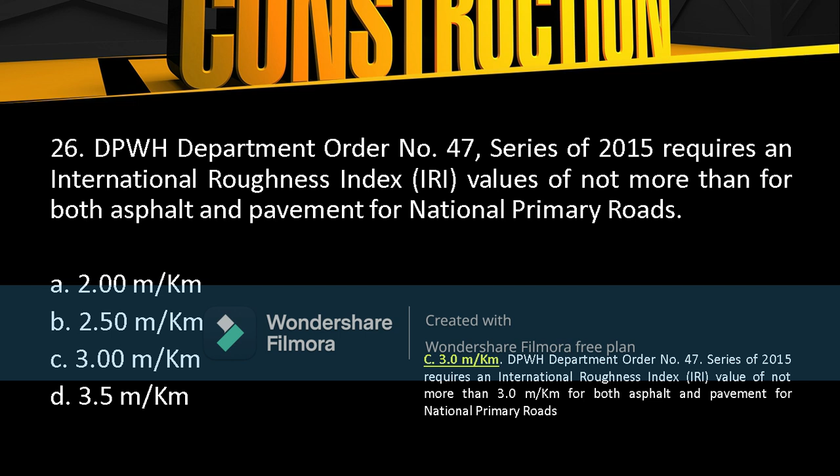Per kilometer for both asphalt and concrete pavement. So ito ang paliwanag sa Department Order ng DPWH Series 2015. So the DO number 47 requires an IRI or International Roughness Index value of not more than 3 meters per kilometer for both asphalt and concrete pavement for national primary roads. So clearly, ang tamang sagot dito ay letter C. So ayan. And now let's proceed to number 27.

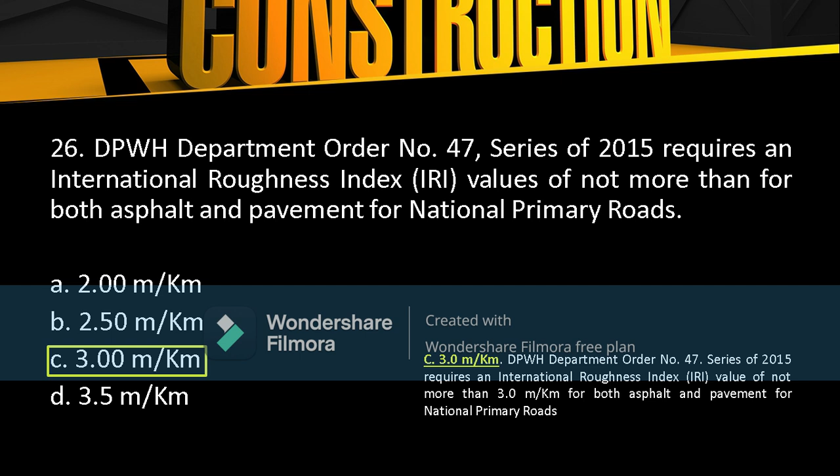For question number 27, to facilitate finishing, forms used on ornamental works, railings, parapets, and exposed vertical surfaces shall be removed in not less than blank nor more than 48 hours, depending upon weather conditions. In order to determine the condition of concrete in columns, forms shall always be removed from them before the removal of shoring from beneath beams and girders. So, sa katanungang ito naman, in-emphasize dito kung kailan nga ba ang pag-remove o pagtanggal ng mga porma sa isang konkreto.

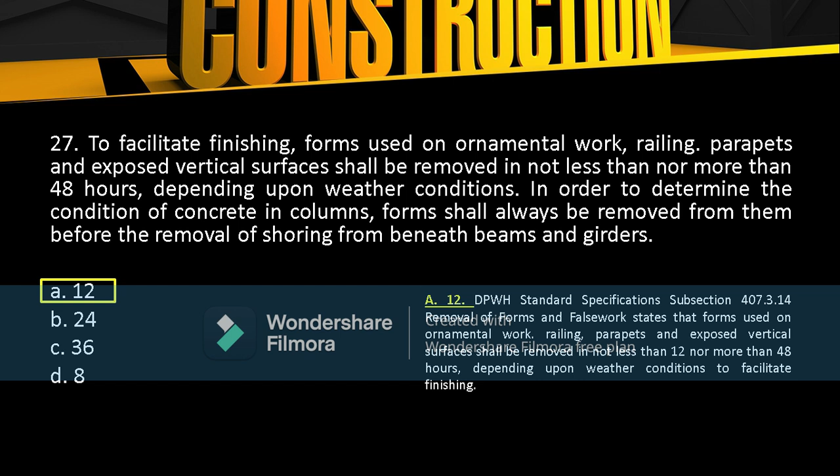A new technology used in the non-destructive testing of the quality and strength of concrete is through a or an blank. So we have also four options here in question number 28. For letter A, nuclear density gauge, B, Geiger counter, C, ground radar, and D, ultrasonic tester.

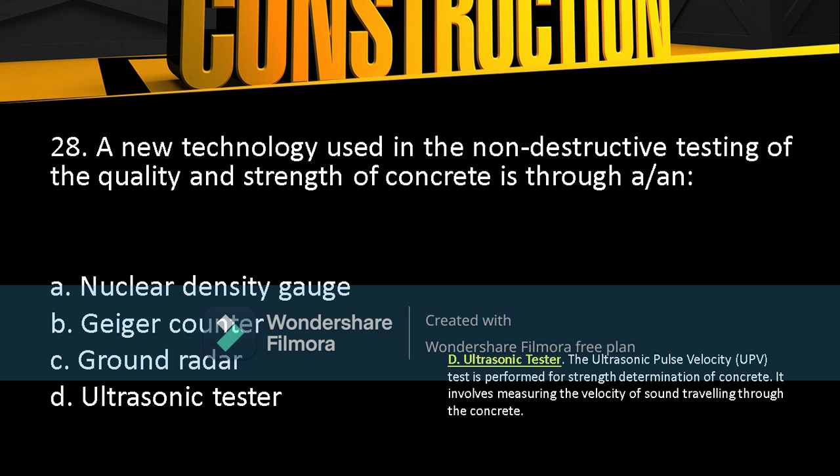So by looking at our reference book, the ultrasonic pulse velocity or the UPV test is performed for strength determination of concrete. It involves measuring the velocity of sound traveling through the concrete. So, ang tamang sagot ay letter D, ultrasonic tester. So, I think it's very clear.

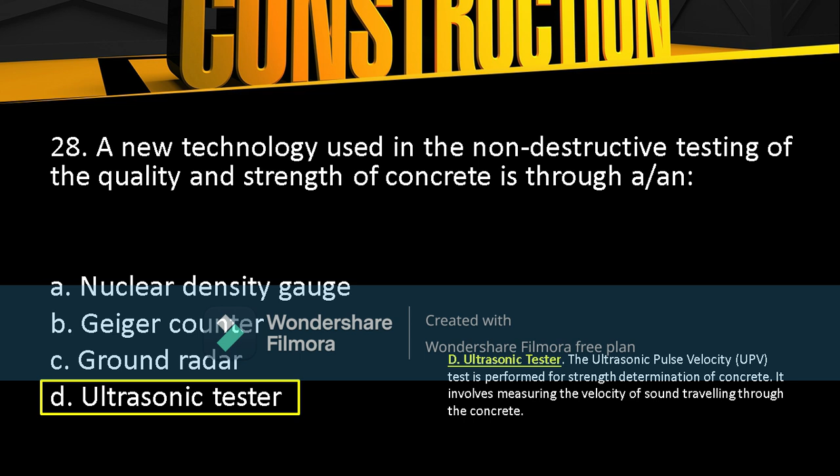Let's move to number 29. Why are undisturbed samples used primarily for determining the properties of foundation materials?

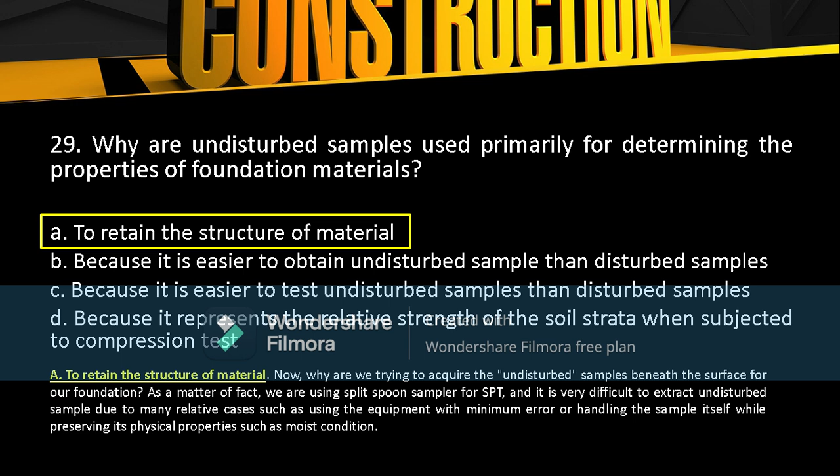Let's proceed to number 30. The purpose of conducting laboratory CBR or the California Bearing Ratio test on the fill materials for embankment is to check blank. For letter A, permeability of the compacted subgrade materials. For option B, swelling characteristic of the subgrade material. For option C, bearing capacity of subgrade materials. And D is all of the above.

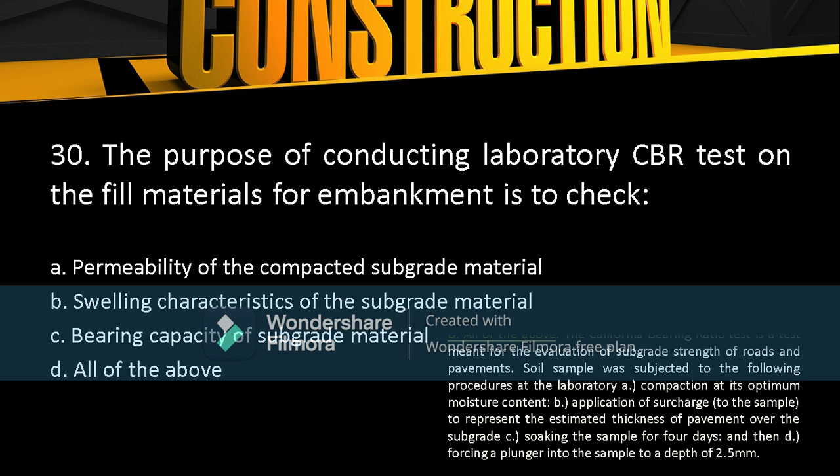The California Bearing Ratio or the CBR test is a test meant for the evaluation of subgrade strength of roads and pavements. The sample is subjected to the following procedures at the laboratory. A, compaction at its optimum moisture content. B, application of surcharge to represent the estimated thickness of pavement over subgrade. C, soaking the sample for 4 days. And D, forcing a plunger into the sample to a depth of 2.5 millimeters.

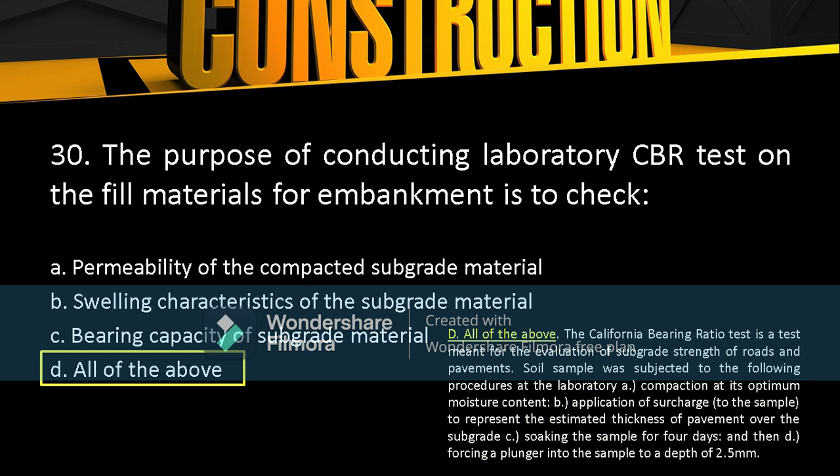So, letter D. Now, let's proceed to question number 31. A mixture of asphalt cement and water with catalytic agent is called?

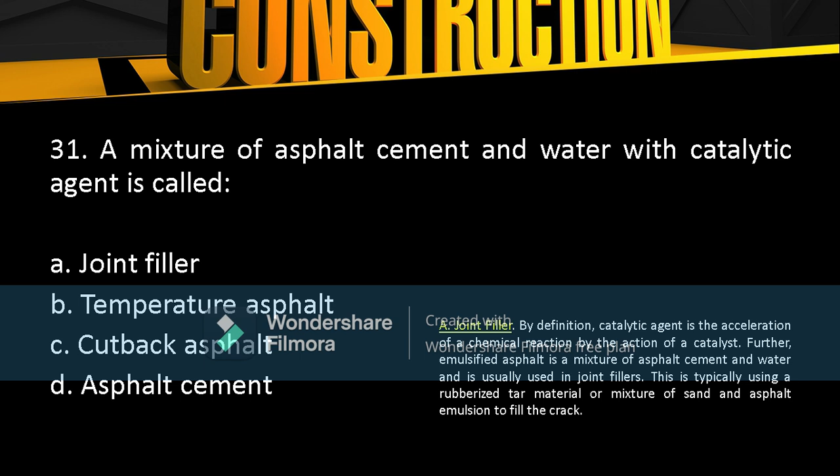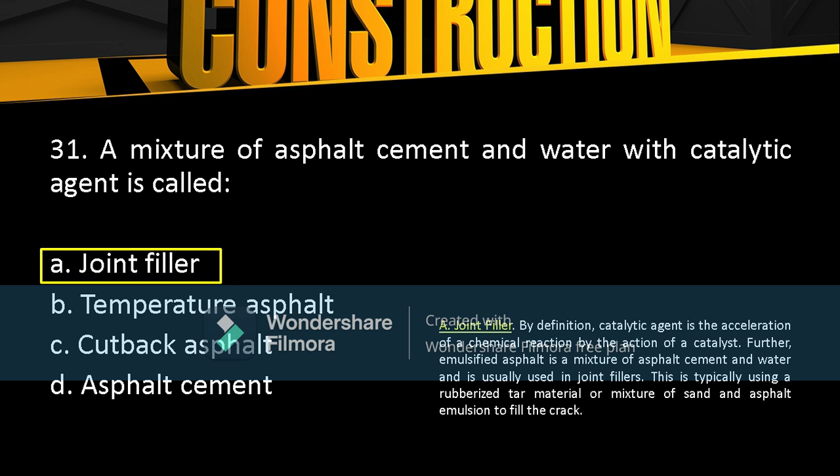So again, for this question number 31, our answer is letter A, joint filler. For question number 32, the Department Order 126 series of 2017, commonly called the DPWH Standard Specification for Item 743, geofoam as an alternative embankment material, states that geofoam is made of what kind of material?

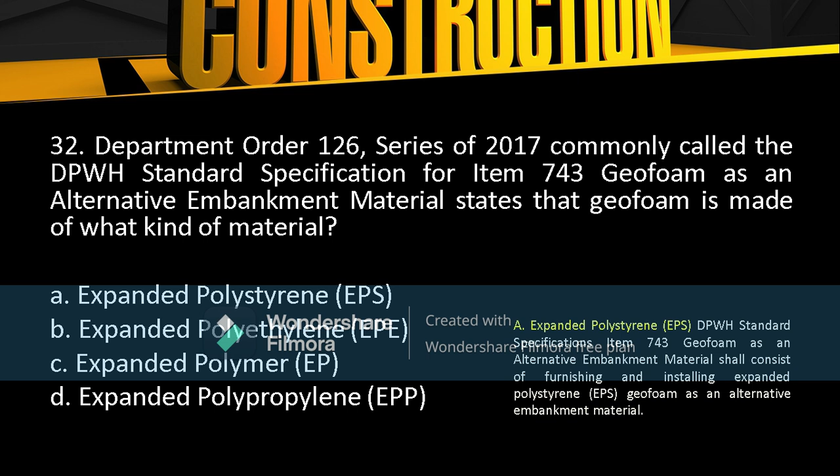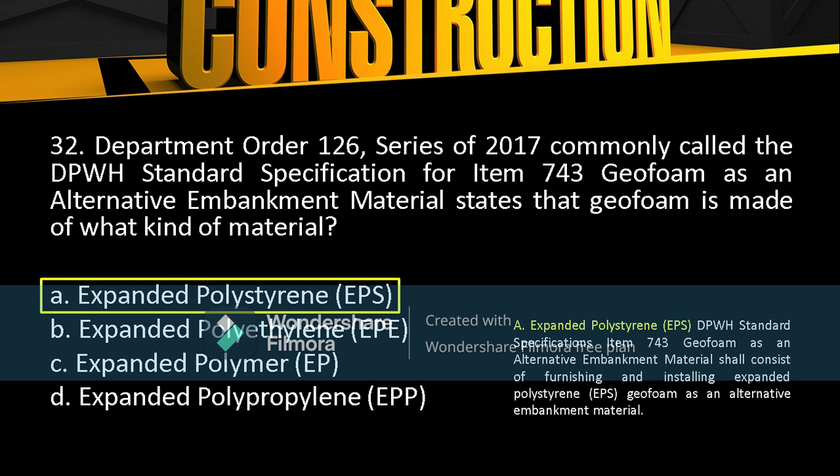So, for question number 33, a one-lane with pavement width of 3.5 meters and shoulder width of 9.5 meters on each side of the pavement was designed to have subbase and base courses with a combined thickness of 300 mm. If the thickness of the subbase is 125 mm, the spreading and compaction of the subbase and base courses shall be carried out in. So we have four options provided for this question.

For letter A, 3 layers over the full width of 4.5 meters. Letter B, 2 layers over the full width of 4.5 meters. For letter C, 3 layers over the full width of 3.5 meters. For letter D, 2 layers over the full width of 3.5 meters. So by looking at our reference book,

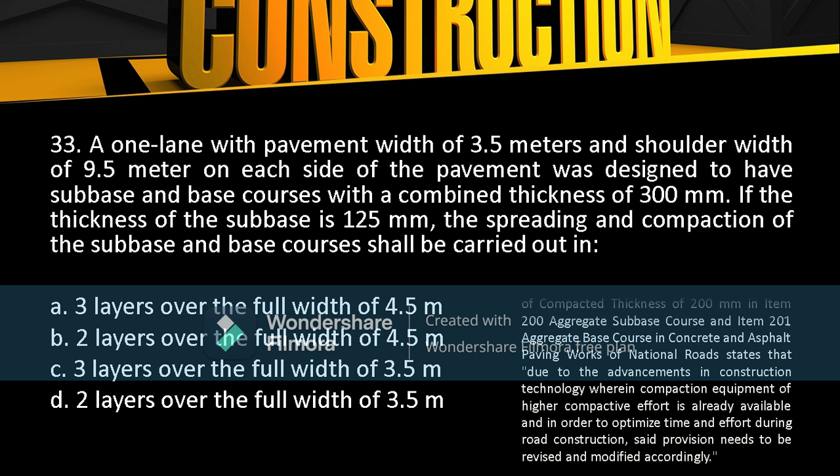it provided us an explanation that the Department Order Number 70, Series of 2016, adoption of compacted thickness of 200 mm in Item 200 aggregate subbase course and Item 201 aggregate base course in concrete and asphalt paving works of national roads states that due to the advancement in construction technology wherein compaction equipment of higher compactive effort is already available and in order to optimize time and effort during road construction, said provision needs to be revised and modified accordingly.

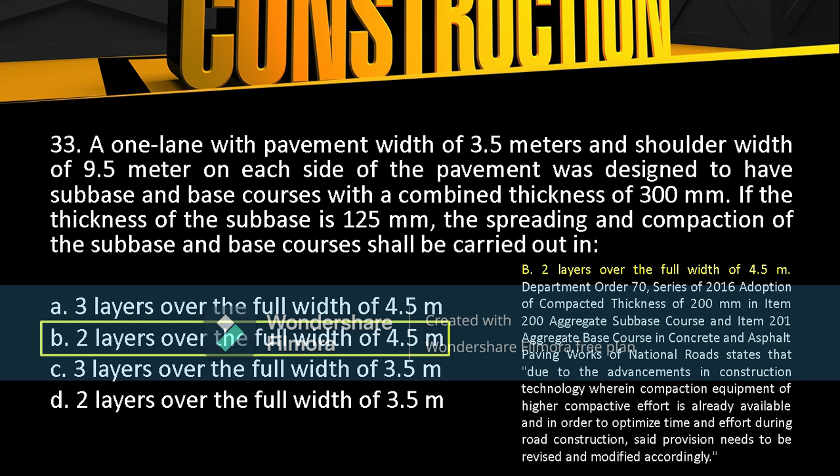So, let's proceed to number 34. For question number 34, the DPWH Standard Specification Item 618, as stated in Department Order 31, Series of 2010, reflectorized thermoplastic rumble strip shall have the following dimension.

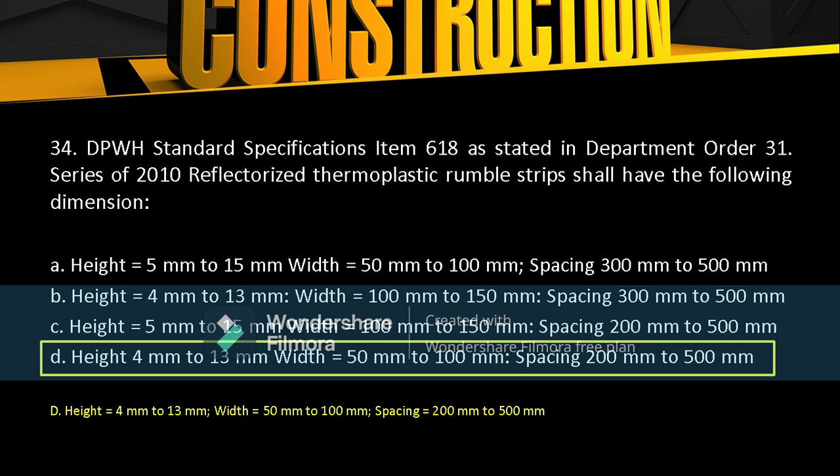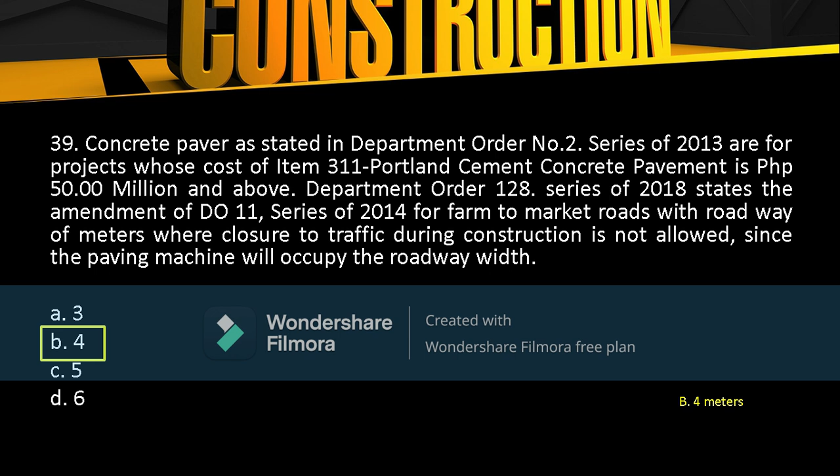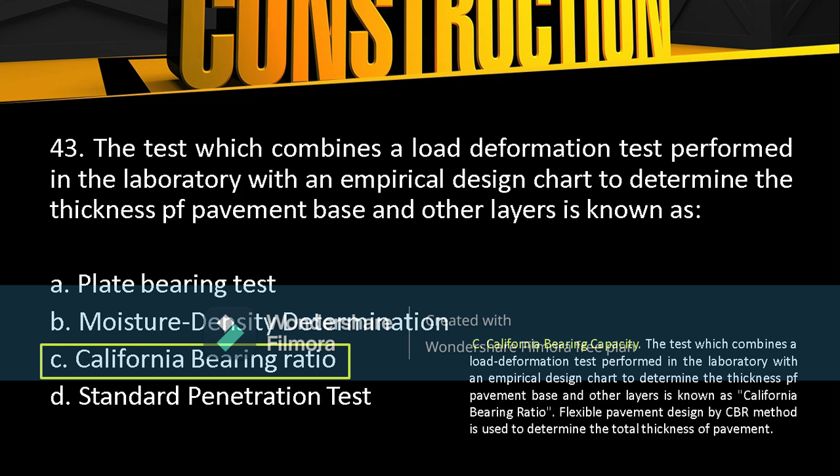So for question number 43, the test which combines a load deformation test performed in the laboratory with an empirical design chart to determine the thickness of pavement base and other layers is known as. So by looking at our reference book, it is known as the California bearing ratio. Flexible pavement design by CBR method is used to determine the total thickness of pavement. So the answer for number 43 is letter C, the California bearing ratio.

For question number 44, tensile strength, yield strength, and elongation are the common required tests to determine the quality of blank materials. Anong material nga ba ang common na sumasailalim sa mga pagsusuri or test?

So, by looking at our reference book, tensile strength, yield strength, and elongation are the common required tests to determine the quality of reinforcing steel bars. So, klarong-klaro, ang tamang sagot sa katanungan ito ay ang reinforcing steel bar. Yan, letter C.

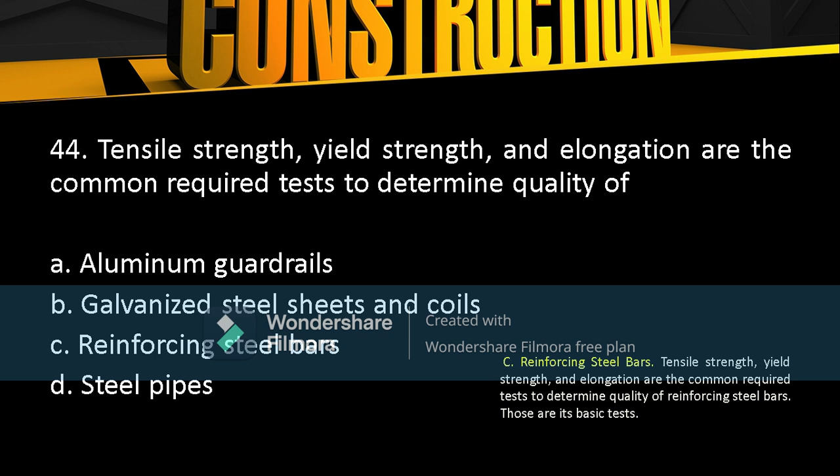For question number 45, which of the following provision is not included in the job mix formula? Sa katanungan ito, nais ipahiwatig kung sa apat na mga option nito, from letter A to letter D, saan nga ba dito ang hindi kasali sa job mix formula?

So by looking at our reference book, from this question, part of the job mix formula is the grading of aggregate, since it will be the independent amount that will be the basis of asphalt cement content. The mixing workability of asphalt concrete is dependent on the temperature of mix. Thus, mixing time is very critical.

On the other hand, since the question is about job mix formula, where we are still looking for the correct amount of asphalt for a given aggregate, option D, temperature of the delivery, is not included in job mix formula. Ayan. Nabasa naman natin na ang option D, temperature of the delivery, is not included in job mix formula. So, ang tamang sagot sa tanong ito ay letter D, or temperature at delivery. So, let's proceed to number 46.

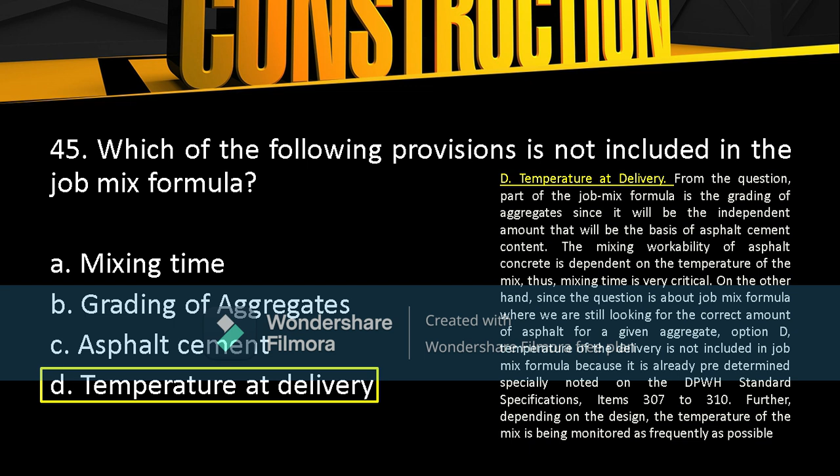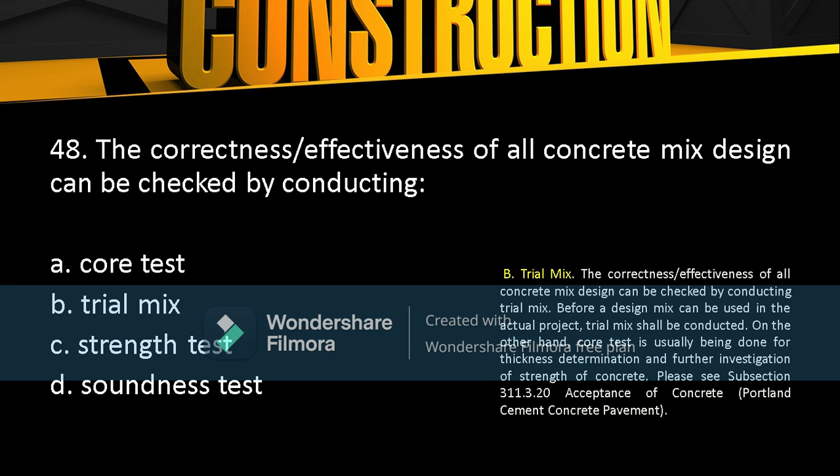So ayan, unang paragraph pa lang, nakita agad natin ang tamang sagot. For question number 48, the correct answer is letter B, the trial mix. So let's move to number 49.